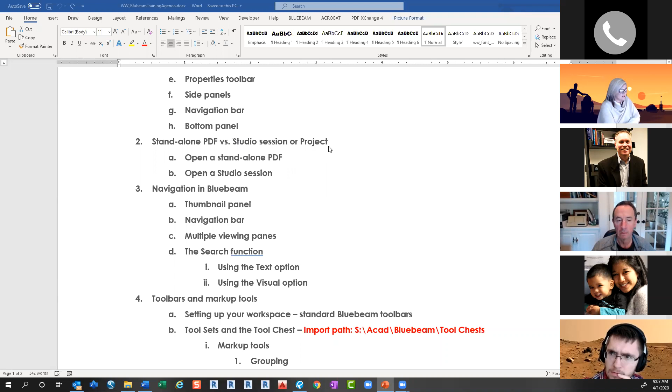So let's get into Bluebeam. This is our agenda for what we're going to cover. First, how to change the workspace color theme. If you're used to Adobe, you might not like that Bluebeam is black. We're going to open it. We have already opened our sample file, or we can open it again. We'll look at the workspace, the menu, the toolbars, properties toolbar, side panels, navigation bar, bottom panel, standalone PDF versus Studio session. Tomorrow's training session is about Studio, so we're not going to get deep into that, but I'll just explain the basics.

How to navigate in Bluebeam, working through the views and using the search function, toolbars and markup tools, just a light touch on that. We're going to talk about the tool sets as well, and a little bit on working with the documents. So we're going to try and cover that in an hour. I'm going to go a little faster than normal, but give you a chance to try it too, hopefully.

So we'll start with, put this over here. Actually, let me do this. Okay, so this is how I have my Bluebeam workspace set up. Let me get this back up and over here. I do want that over there. I'm trying to get all of these things minimized here.

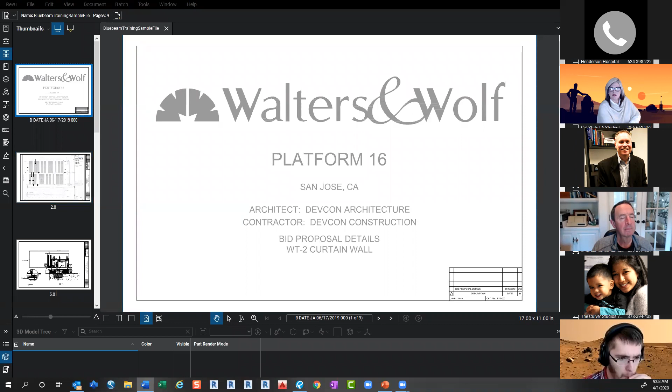All right. So if you don't like the black color of Bluebeam, you can go to your preferences, and on the left, on the general tab, there's options. There's a whole bunch of stuff you can explore here. But you can change that theme to light right there. This is just a light or a dark, and that makes it look a little bit like Adobe. But I'm going to work with it in the dark mode. That's my preference. Okay, so that's the very first thing, just to get you comfortable.

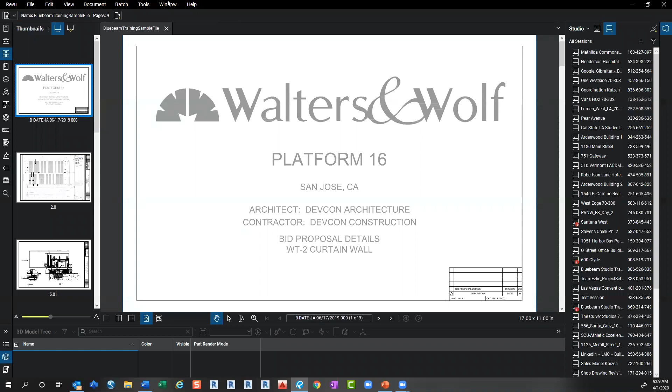So now what we're going to see is in here in Bluebeam, you have the main viewing area. You have all of these panels over here on the side, and these are like palettes. They basically are little flyouts with different tools on them. You have a typical Windows-type drop-down menu at the top, and we do have a properties toolbar that shows here when we get into some tools. I have most everything closed. When you open Bluebeam, you might have a lot of toolbars open.

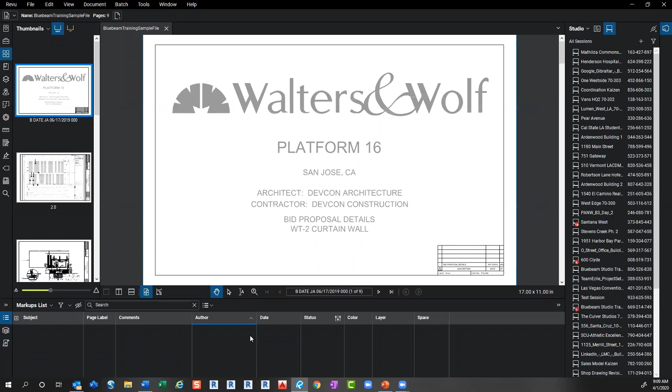So I'm just going to turn them on real quick. You might have a whole lot of buttons going on up here. Those are all toolbars that you'll be able to close or open as you like. We'll get into toolbars again later. There's the markups list down here at the bottom, and a couple of other options. You can toggle between these three options, but markups list is going to be the one that's most useful.

There's some navigating down on the bottom. And over here, I have my studio tab over on the right, but yours probably doesn't look like that out of the box. I'll just drag it back over. But you can drag these panels to wherever you like. So I'm just dragging mine over, and we can go over that again later. So those are panels.

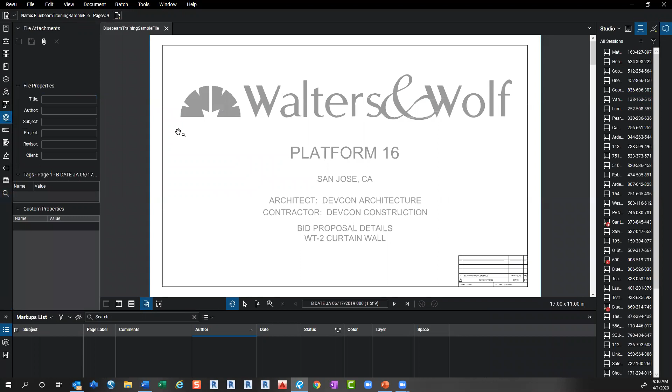Also you'll see you can get to different information in a bunch of different ways, and depending on what we're doing, we're going to see potentially properties up here, but there's also property information that can show up here. So it's like any other program, you can get to the same information in a bunch of different places. So I like to keep the thumbnails tab current.

So it's a little foreign at first. It may not feel intuitive, but once you get used to it, just like any other program, it becomes easier to understand. So again, you have your standard menus. A lot of your markup tools and stuff are going to be up here, but we're also going to look at tool sets. So this is all stuff to explore, stamps and all that we're going to get into. But that's the main workspace.

I think I use thumbnails and this down here for navigation the most. So I use this navigation bar a lot. Some people like to use bookmarks, and there's a bookmark tab for that as well, or panel.

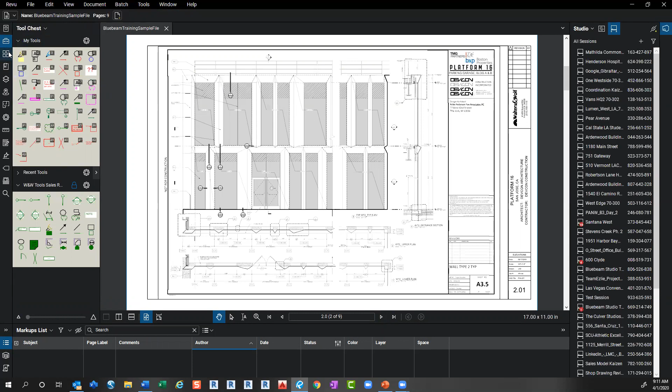Okay, so what's the difference between a studio session and just a regular PDF? Right now I'm just in a standalone PDF. I call it a standalone PDF. I opened it from a hard drive on a computer. I have it locked. Nobody else can get into it. So it's standalone. With a studio session, which we'll get into tomorrow if you're doing that training, which is what we see over here, it's a cloud-hosted environment.

So if I open a session, I will be looking at a team of people that are in the session who've been invited or who are working in it. Although at Walters & Wolf, anybody can join. I have all these documents that are handy to me, and these documents are hosted in the cloud. So they're not living on a hard drive anywhere. Nobody's locked out of these files. The files are living in the session, and anybody can mark them up at any time in that session.

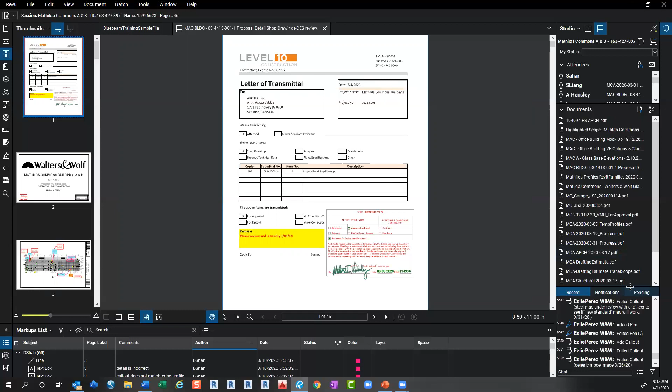And those markups are saved in the cloud as well. So this is a very live environment. It keeps track of everything about the session, all the comments, all the notes. You can see down here, it's tracking the markups, but the markups are tracked in a standalone PDF as well. So if I close that document, I'm closing it from that session. Right now I'm in my own file, and if I do make a markup in here, the markup is still tracked. So they both do that function, but only I can access it right now.

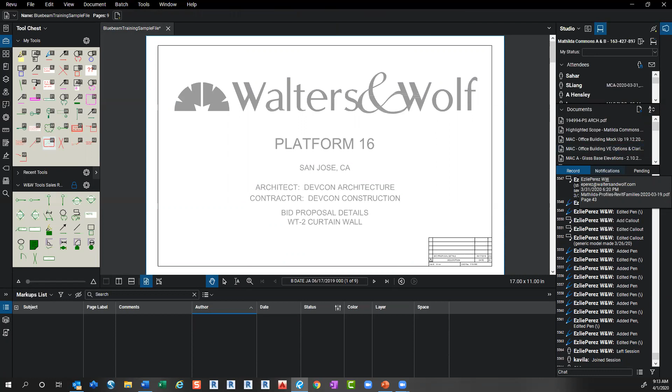Okay, so we're going to talk about navigating the documents. Actually, I'm going to pause for a second, see if there are any questions.

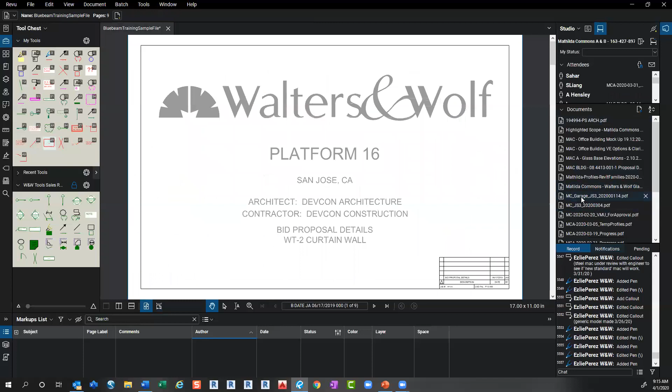So when you're in a session, if I come in here, let's see if I can find a markup. I've got to find it, I don't know this session. Okay, here's a markup. So right now this is in the session and it's a live markup. I can pick on it. I personally can't do anything with it because I didn't create it, but Shiloh created it. And if she wanted, she could delete it. So she owns that markup, but it's also live in this session.

You can access it. If you do a markup on a standalone and then you add it to the session, the markup will go with it, but I believe it becomes flattened. It becomes part of it, you can't edit it. You can't select it anymore like you can here. So it will take it with it though.

Let's see, what else do we have? Do you have questions coming in about Studio? Those are good questions: how to add files to an existing session, we're going to go over tomorrow. How do you access the W&W toolset? We're going to go over that today. How do you add a signature to a document? We can look at that if we have time. Oh, Hensley, thank you, she's trying to answer all those questions as well. If we don't cover it today, we can cover it tomorrow in the Studio session.

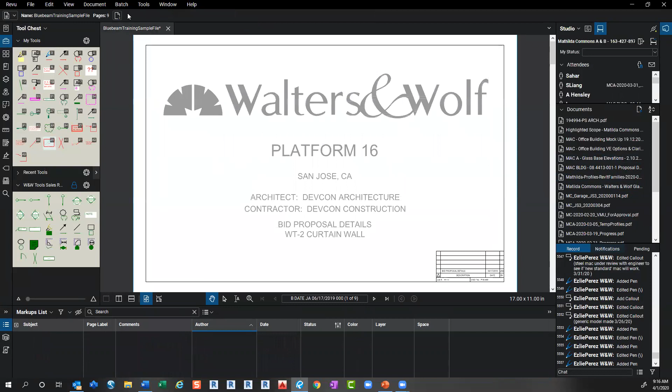I just wanted to touch on it today, to explain the difference between working on a standalone file and working in a session. But I'm going to exit that session, and I'm going to close my Studio panel for now. And Steve just said Slipsheet is available in the Extreme version only. Okay, great. So I'm going to hold on that for a second, and we'll talk about navigation.

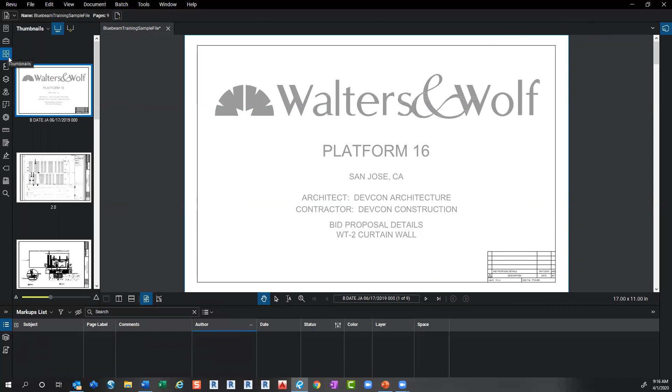My favorite way to navigate a set of drawings is the thumbnail panel. It's what I'm used to, and it's this four-square button over here on the left. You can see at the top it says thumbnails, and you can change the size of your thumbnails. You can make this as big as you want. I personally like this method because I can see the images of the sheets, so it's my preference for navigating.

I've seen a lot of people at Walters and Wolf using the bookmark function to navigate, and that's okay, but a lot of times bookmarks aren't working, or there are issues with bookmarks on sets that we get from somebody else. The thumbnails always let you at least see the sheets, and you can pick on them to go to each sheet.

The navigation bar down here at the bottom has several arrow buttons. You've got the page number in the middle, and we'll talk about that in a second because those only show up if there are page labels. If you want to navigate through the set, there's single page forward or page back, and there's the one that goes all the way to the front or all the way to the back.

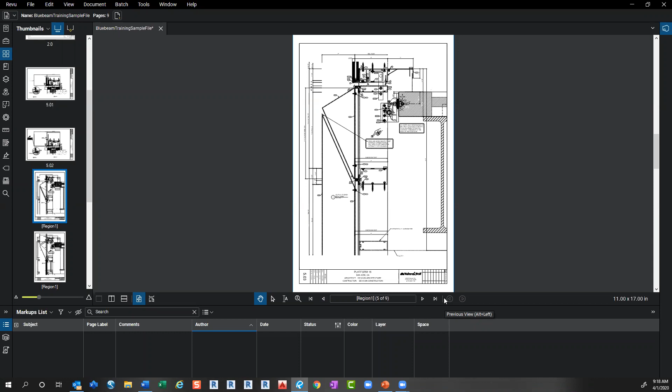And then if I go back to the front here and I pick here, I don't know why. Usually the previous view and next view are highlighted, and it'll just back you up. I'm not sure why it's not showing up right now, which is kind of weird. Usually those are available, and that's a way to step back through your document. I'm going to have to look that up. So that's a little bit of navigation down there.

You can also type in the name of the sheet. If you know you need to go to 5.01, you can just type in that sheet name and it will take you right to that sheet. There's the pan, select text, zoom. These are typical tools. Mine is always set on pan, but if you wanted to zoom in on something, you can do that.

Normally I should be able to step back, but it's not letting me. That's really strange. So you can see right now I've kind of messed up my view. How do I get my view back if I want it extended all the way out? I can just pick that one full page button.

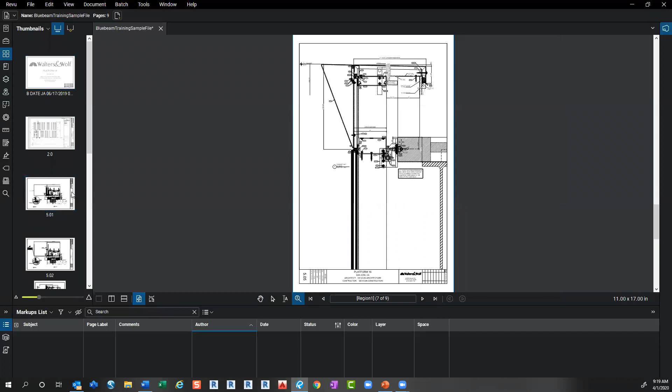So we'll look at that now. So I'm going to go back to my elevation. And when I'm working in Revit and Bluebeam and I'm trying to see all the different stuff to build my model, I like to look at an elevation and a floor plan and maybe a wall section and a detail all at the same time. So I'll start splitting that screen up.

So I'll start with the elevation. Oops, let's do that extent. I'll split it. So now I have two views, and then I'll pick in that right view. Oh, I'm set to zoom. Let me unselect that. Okay, now set back to pan. So now I'm in that right view, and I don't think there are any wall sections in here, but I'll just look at several details at the same time.

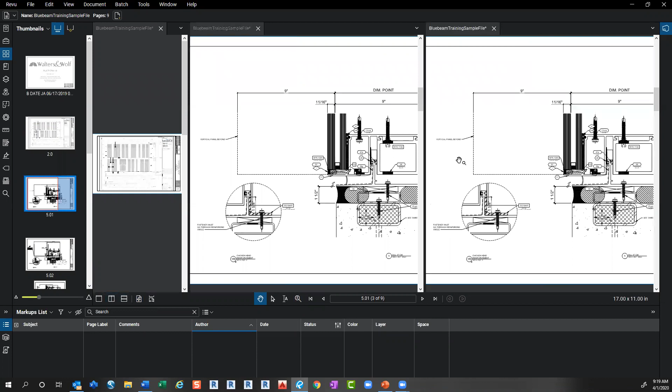So now, if I pick in this view to activate it, I can split it again, pick in that view to activate it, and split it again. And in each view, as you select it, and then pick something from the thumbnail, it will change that view. So if I pick in this current view right here and select that detail, now that one shows up. So I can have multiple things to look at the same time, which makes it really nice.

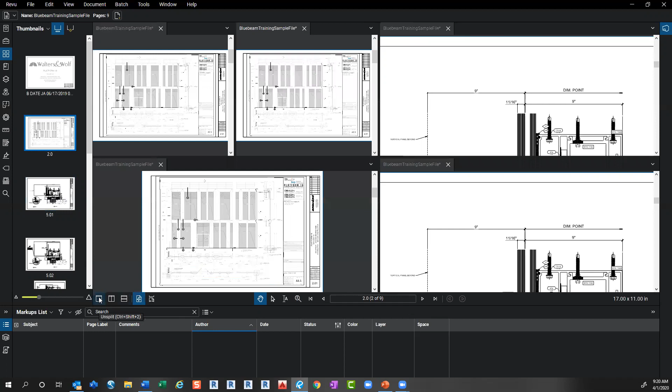You can split them any way you want. You can split them vertically. So if I activate this view by picking in it, split it vertically. Activate that view, split it. You can activate that top view and split it horizontally. This one will unsplit, or you can just close them all as you don't need them anymore.

So again, when the view is active, you hit that split or split horizontal, whatever way you want, pick in the active view and then split that one. So I use that all the time when I'm working in Bluebeam because I'm always looking at a bunch of different drawings at the same time for modeling. So that's multiple viewing panes.

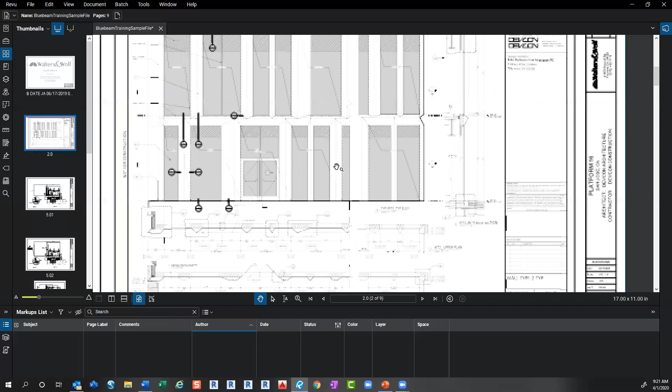And when you're in those viewing panes, these other two options over here, you saw me hit this one down here several times. That's one full page. And then in my Bluebeam, when I roll the mouse, it zooms in and out. I think there are settings where you can change that, and that's in the preferences that we'll talk about later. But if I set it to this one, scrolling pages, it puts it to the extent of the viewing pane. And now when I use my mouse wheel, I can scroll.

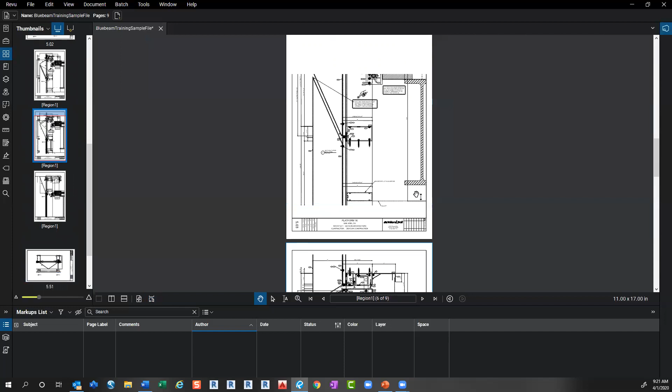I can still hold the control key down and zoom in and out though. So that's what I'm doing right now. I'm holding down that control key. Now I'm still just scrolling. So that's the scrolling pages option. Zoom extents to get the full page. Use the scrolling and roll your mouse wheel. Hold down control to zoom in and out in that setting. And now I'm just rolling the mouse wheel. I'll go back to zoom extents. One full page. I call it zoom extents. It's an old AutoCAD term.

Okay. So we talked about the thumbnail panel as a way to navigate. You see when I pick it, it goes away. If I pick it again, it comes back. You could use the bookmarks, but that's the thumbnail panel. Then there's the navigation bar down here to help you, and the multiple viewing panes is a nice feature. You can see more than one thing at a time.

So one of the really cool things that I like about working in Bluebeam is the search function. If you do need to search a document, I'm gonna play with the search function in two different ways. When I bring up that panel, it's just a little magnifying glass over here. And so when I pick on that, I have the search. This is the tool. You can see you're in the right place up here. And if I hover over this, it's searching by text. If I hover over this, it's searching by visual, which is really cool. So I'm going to pause here for a second because I do see some questions about navigation.

So bear with me for a moment.

Will you still be able to see who marked it up when it's flattened? I don't believe so. If you can't pick on it, we really can look at that. I'm not sure, it's a good question.

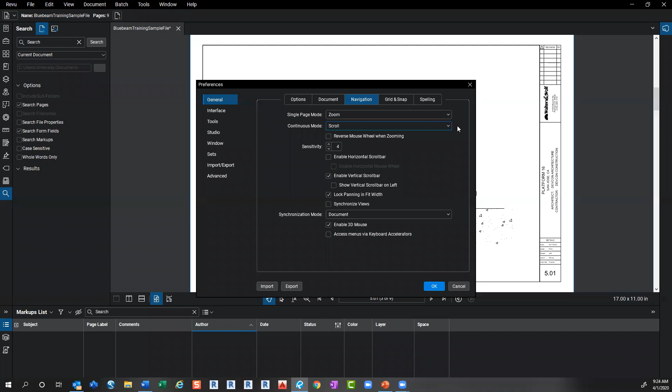Okay, so I'll just touch on that now so you can play with it, and then we'll go back into preferences again later. If you go to preferences, general, and navigation, you can change your settings here. That's how mine was set up. If you want to change it, you can play with continuous mode, single page mode. There are some options in here that I might have changed and don't remember from when I set up Bluebeam a long time ago, so I apologize for that. But this is where you can play with all kinds of settings about how the mouse behaves.

How do I get the navigation bar on the bottom? If the navigation bar isn't open, go to the tools dropdown, go to toolbars, and check on that navigation bar. If I uncheck it, it goes away. I thought it was on by default, but maybe it isn't. So you can get all of those toolbars turned on or off. I keep most of them off, but to turn something on or off, just check it in that toolbars option.

Actually, the properties will show up. Okay, great.

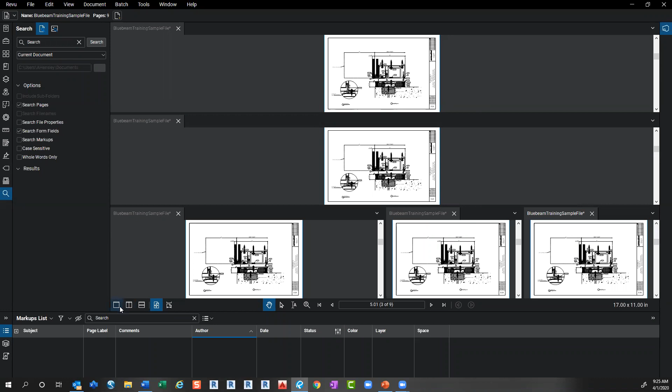How many multiple views can you do? Gosh, I'm not sure if there's a limit, we can find out. They're too small to split further. Okay, there's your answer - you probably have to keep them a certain size, and then it will tell you it can't go any further. So it looks like there's a size limitation, but that's a good question. Let's go back to a single view.

Navigation bar disappears when on the laptop, but shows up on a larger monitor. Well, that's interesting. If we do have problems with some of that stuff, we can take a look at it. I'm not sure of some of the quirks that might be showing up with Bluebeam, but if you can't get something to work right, definitely reach out to me. Bluebeam also has really good resources online for getting help on stuff like that. So we can find out if that's a known issue if we need to.

Okay, I'm going to stop the questions for the moment and play with the search function. I'm going to search by text first - maybe I want to find every page where embeds are. I'll do a search for just the embed text. If I do search, you'll see all these pages show up down here, and if you select on them, it will take you right to the sheet where that text is. If I pick on any one of these, it doesn't necessarily zoom in on it - it's just taking me to the sheet, but it will get you to where that text exists. That's nice, and you can just empty the search results.

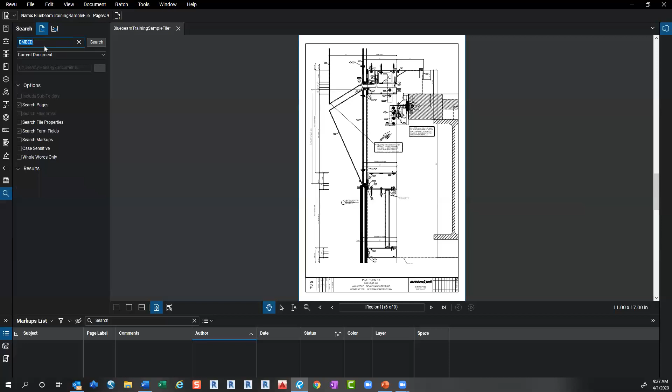So again, you're just typing in a word - I want to find out where shadow boxes are, where my shadow box details are. I do a search for that and I get one sheet right there.

But the really cool thing in my mind is being able, if you do need to search, maybe you want to find a particular callout - you're not sure where, maybe there's a fastener or something that's called out and you want to catch it and change it everywhere, or maybe it's wrong. You can search by visual as well. You could use the text potentially, but you can also search by visual.

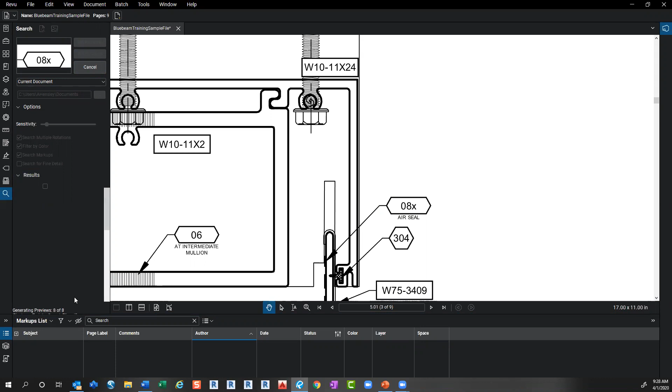So if I go back to that search panel and select visual, I can do a get rectangle, and I'll do a little screen capture. So it puts that image there. If I don't mess with any of these other settings, and just tell it to go ahead and search that, tell me everywhere in the process - you can see down here it's processing, and it's finding everywhere in the set where that shape shows up. But it's not getting specific about the text.

So I want to find only the 08X, so I'm going to clear those search results. And again, with that same rectangle I already captured, I can set the sensitivity up and then do the search again.

And it'll get more specific with its results. So now it found 2 sheets, that sheet and that sheet. So if I zoom extent and I pick on these, you can see it taking me to the different sheets.

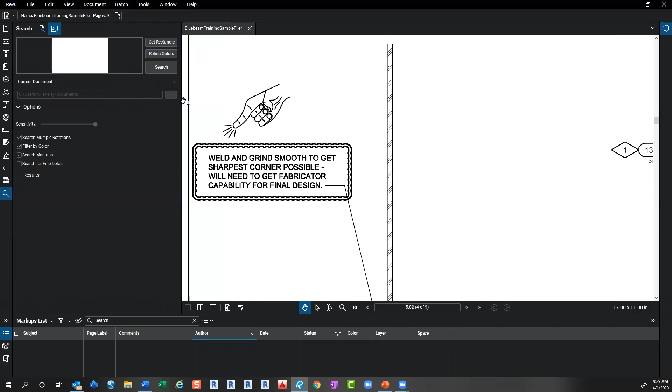So again, I'll just clear that and make a new get rectangle. I wonder if we can find this guy anywhere else. Is this anywhere else? Is it going to find it? I haven't tried searching for that guy. Let's see. Maybe we can try get rectangle and search for this. There we go, didn't like the single finger. So I'll do a search for that image.

And again, it's processing, and it's a very refined search. So it's going to find 2 sheets where that exists. So I think that's a really nice little tool.

And again, you can also tell it to look in just the current document, the current page, or all open documents or documents in a folder. So it can get pretty powerful. I haven't played with that a lot or needed that, but if you do have multiple documents, and this doesn't have to be just for drawings. It can be for contract reviews or anything that's very wordy. You can tell it to look for specific text in a lot of different ways, and it'll dig deep.

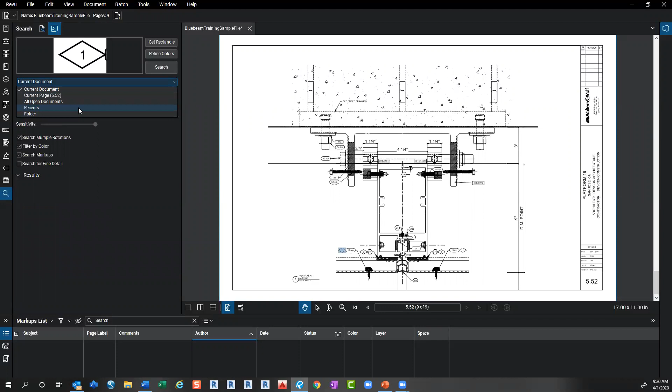So that's that search function.

Does it search the image or the text in it? Does it work with scanned documents as well? So scanned documents are a different beast. If I go back to, this PDF has a scan on it, and I can't do anything with that screen captured or copied thing. I believe it has to be printed using the Bluebeam printer driver or a PDF printer driver to be able to get to the elements.

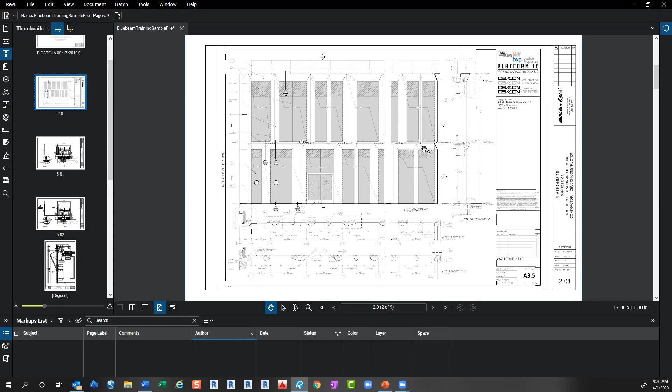We can try, let's see if it'll find it. If I go to search, get rectangle, and do that. Well, it still sees it, so let's see what happens. Okay, it only found one, but there is another one here. So I don't know how far it will reach to things that are not generated through a printer driver. So it only found that one. I don't have a good answer on that one, but yeah, that's a good question.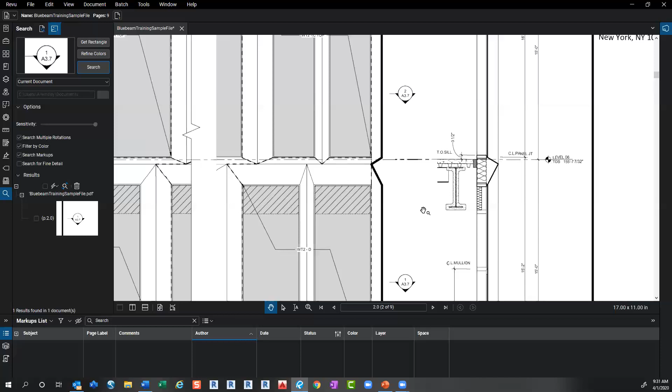Okay, so that was the search function by using either text or the image that you do a little screen capture for.

All right, so now we are going to go to toolbars and markup tools. I'm going to very lightly touch on this, but Bill is really a great resource for getting more into customization.

The basics of customization, as far as tools, if you go to the toolbar and the tools drop-down menu and toolbars, you can turn on all of these different options if you want. But you can also come down to customize, and you can actually change what's in each of the drop-down menus. You can create your own toolbar, so if I say add, I can make an Amy toolbar.

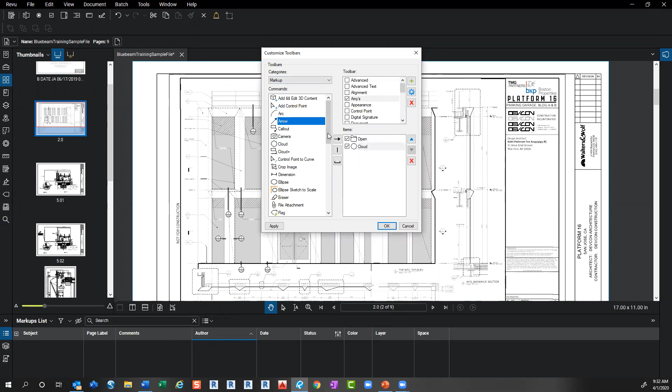And now that it's current, I could add my own tools. So I could go to the markup drop down menu and add my own handy tools here. And now I have my Amy's toolbar, right there that I just made. So if I turn off all of these other ones that I don't care about, I have my own little custom toolbar here with just what I like to use.

So that's a nice way to customize the space. When you go to tools, toolbars, instead of using the default ones, you can go to customize and create your own by hitting add, giving it a name, selecting it, and then going through all of these different menus to grab the tools you want to use. We've got a lot of tools in here that I never use that probably are really handy.

I love Align in Revit, so it's probably great in Bluebeam too. Document management, all of that. You can add any of these to your personal menu just by hitting that little right button. You can add a divider, separator, and then add more items to it. And if I pick OK, then I get a little... whoops, did I cancel it? Nope, I did do it. Okay, there it is. It should have updated that, but it didn't.

Let's try that again. Well, I don't know what I did wrong. I haven't played with that much, but I know you can go in and customize it and talk to Bill. He's a really good resource for messing with this stuff. I'm going to turn that one back off though, because I don't really need it.

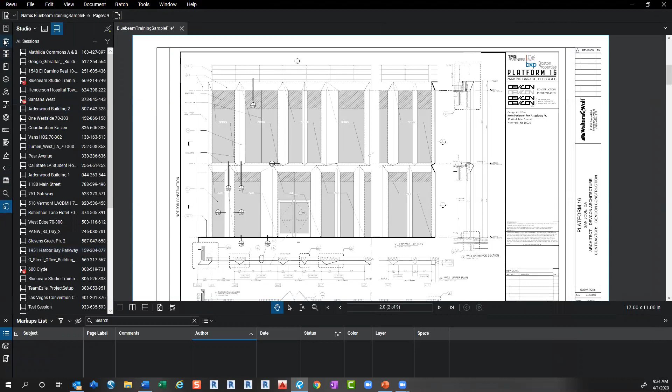From these panels, like you saw me do earlier with Studio, if you want to have them on the left or the right, you can drag and drop them. Whoops, I did not mean to do that. I think I undocked it, completely undocked it, so let's get that right. Just pick on those different panels and you can move your toolbars over and drag and drop. I like to keep mine over here, with Studio on the left.

So we'll talk about the markup tools. We'll talk about tool sets now, tool chest and tool sets. Okay, so first of all...

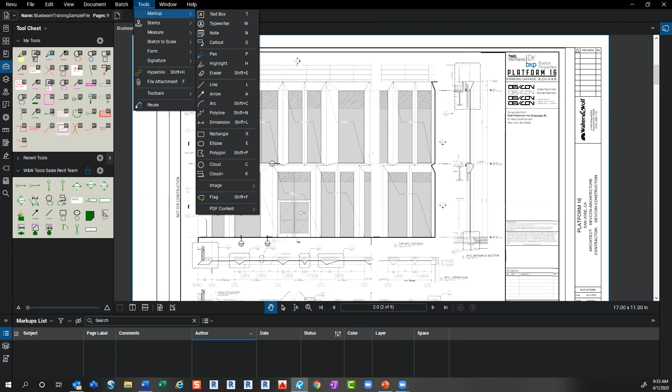Markup tools are on the tools menu, like just the standard markup tools, can be found in a couple of places. There's some basic markup tools that you're used to, the line, arrow, arc, and all of that. Here, actually I hear somebody, so let me just check to see if I need to mute. Let me find it. Ah, there we are. Okay, so there's the tools, markup up here, and line.

Okay, so there's my line. I've created a line. When I pick on it, now I can see this properties toolbar up here, and I can change its color right there. I can change its thickness, anything like that. It's normal. You can change the line type, whatever you want to do.

So once you have a markup there and you pick on it, that properties toolbar will show up and let you edit that item. You can also go to the properties panel, and that will give you all the information about that tool as well. You can get really custom in here, because now that I've made this, I could give this a name and add it to my own tool set. We'll get into that in a second.

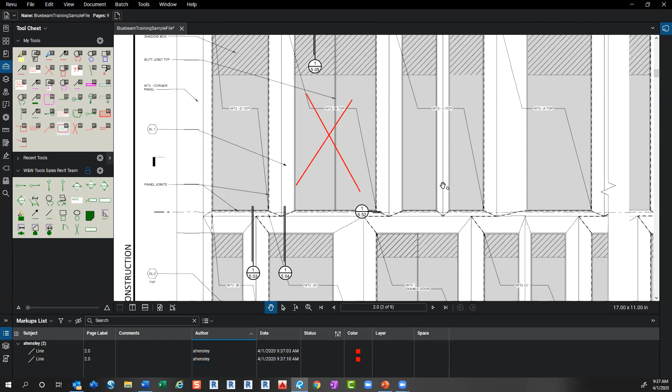If I say there's a typical markup that I do all the time, let me get this back open. So maybe I make a line and another line, and I want this X, and I want to use it over and over again, and maybe I have some text with it or whatever. If you select both items by holding the shift key down and windowing it...

Hold that shift key down and right click, you can create a group. So now it's a single markup. Then you can right click, add to tool chest, add to my tools, and now that tool is there. So if I don't have it on this sheet and I want it, I can just grab it off my little tool set. To get the tool chest going...

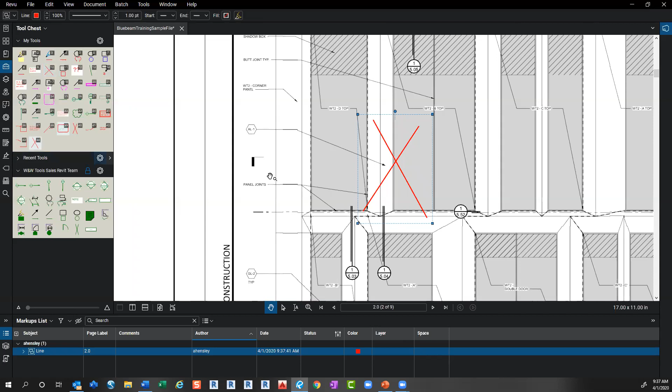You click on the tool chest panel, and right now I have my tools expanded. So that's how we did that. I just showed you a couple things all at one time: there's the tools, create a markup, create some sort of custom markup if you want.

Let's go in and, whoops, we'll do some text. Okay, so this is something I want to put everywhere. Again, I hold down the Shift key and window it from left to right. Hold down the Shift key, right click. Oops, I lost it, sometimes you lose it. Right click, group.

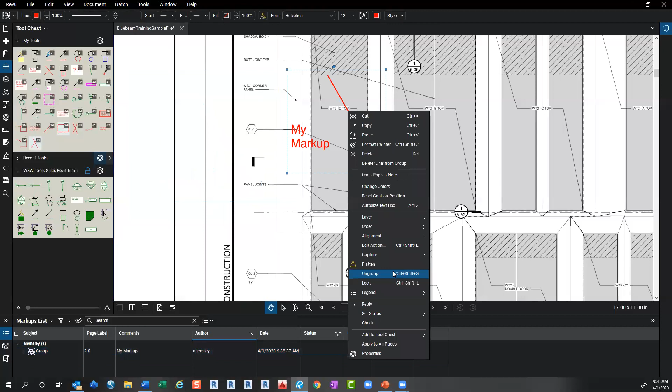And now it's just a single markup. You can also ungroup it. If I right click, I can ungroup it and it basically explodes it. Now that I've created it, if I have my tool chest palette open and my tools expanded, I can right click at the bottom, add to tool chest, my tools, and then I'll see it there as my custom tool that I can just bring in. If it's something where it's sort of what I want, and I want to be able to edit the text, I can right click after that and explode it or ungroup it, and then change it.

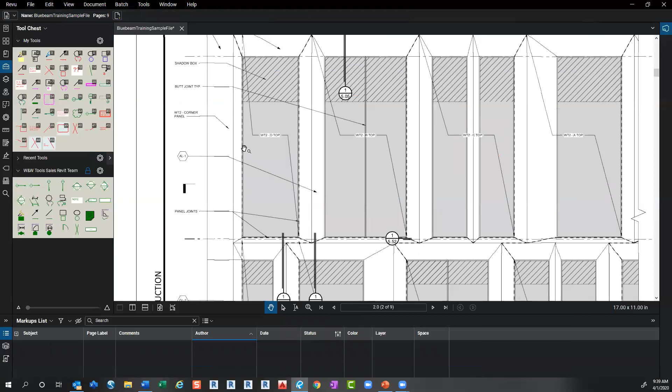So if you have something you do repeatedly that's not on one of our standard tool sets, which we're going to get into, then you can just create your own. The only thing that we do ask is if you're working in studio sessions, we do have specific colors for the different types of teams. But if you're doing your own markups and you're just doing your own thing, go for it. Make the tools that work for what you need. I have a lot in here. I bring in my little revision bubble. So that's the standard markup tools from the markup dropdown.

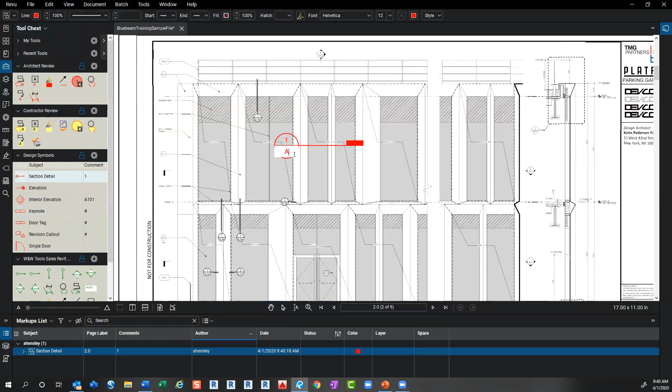But once you do get that tool chest panel open and you hit that dropdown, you see there are a bunch of default sets that come with Bluebeam that have tools you can use. So when making the standard tool sets for Walters and Wolf, which again we're going to get into, I actually grabbed from a bunch of these existing tool sets, and then I just made the colored groups. So the nice thing, you can bring in the section detail and you can just edit it. So they have all these pre-made symbols that are editable and ready to go.

So to customize it, all I did was pull that onto the sheet, pick on it, come up to the properties and change the color of the line, change the color of the text. That's not a very good color, but maybe I want to change the font, or maybe I want to make it bigger. You can just pretty much do whatever you want. You can grab something that exists, select it, and in those properties, either on the properties toolbar or on the properties panel, you can make it your own tool.

You can give it a name if you want, subject, section detail, new, and that should show up. So if I edit that, and then I go back to my tool sets and I added it to my tools, I believe section detail new now shows up as the name of the tool. So if you do want to give it a name, you can pick on it. You can grab from something that exists, pick on it, customize it using properties or using properties this way. You can give it a name here in the subject, and then that will be what's in the hover over with the mouse. So a lot you can do to just really set it up the way you need it.

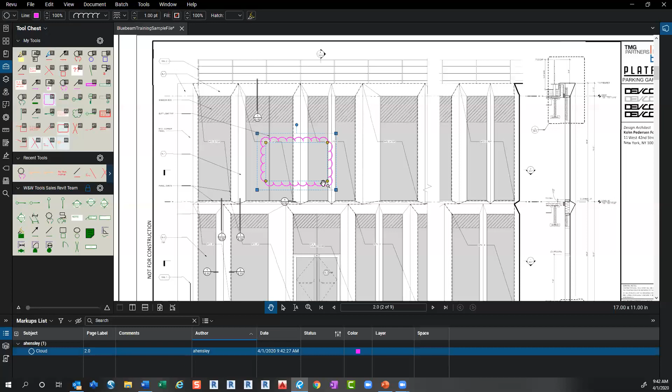Add it to My Tools, right click, add to tool chest, My Tools. Then you go back to your tool chest, and there it is. And when you hover over it, you can see that new name, and you have that new tool ready to use. So there's a lot you can do with what comes with either these markups here or with the standard markups that come with Bluebeam, which are up here. But you can see also in my list I'm going to turn off these other ones. I like recent tools. We can talk about that for a second. Recent tools just keeps handy things that you've just done. And as you close out of your session, I believe it will clear that back out again. So this just keeps things handy if you want, but it will clear out after the session.

But also, if I close that, you can see I have this Walters and Wolf Tools Sales Revit team. So every team in the studio sessions has their own color. So they all have the same set of tools, and we just went in and we made new colors for them. So the estimating team uses blue, Jumpstart, red, and everybody has their own color. There's Ezile's team color. It was just basically take these tools, bring it out here, pick on it, pick a new color, and then add it to that tool set. So it's getting into, but these are our Walters and Wolf, they're locked down, so we can't edit those.

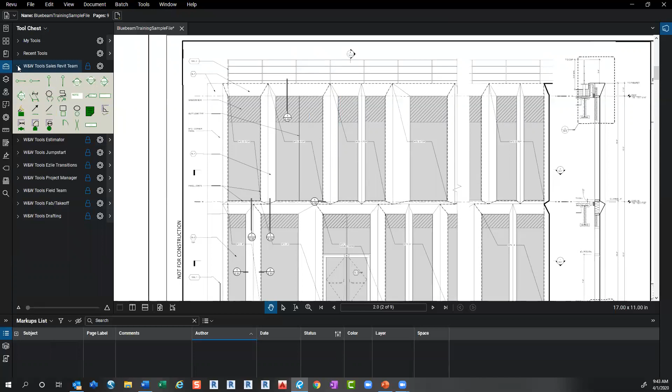So again, the colors here only apply in the studio sessions, so that when everybody's making markups on the same sheets, we know where the markup's coming from. You don't have to use them if you're just working in standalone PDFs, that's your call.

But to use those, if you go to that drop down and you go to Manage Tool Sets, let me see if I can get this to grow bigger. I don't think I can. Okay, so you can see all the different tool sets I have loaded. And if they're checked, that means they're on. If you don't have them, you go into that Manage Tool Sets. I'll just go back out again. So Tool Chest, Manage Tool Sets.

And you import by browsing to our server, which I'm not connected on the VPN right now. Let me get that connected. That's the wrong one. I forgot about doing that this morning. So you browse to the server, and we do have some tool sets, and they're in this drive. I just got to get connected so I can browse them. That's taking a second. There we go.

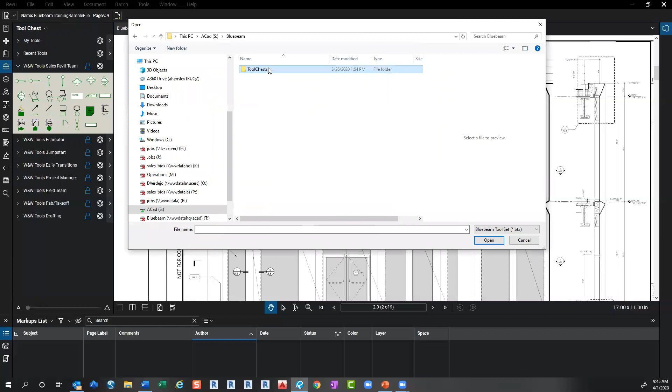Okay, so on Fremont, we have our ACAD drive. And in there we have our Bluebeam folder and our tool chest. And these are all the standard tool sets right here. So I'm going to bring in the shop drawing review stamps because this is something new that Kaizen group has been working on. And I'm just going to pick the open button. It might take it a second. So now I have imported that set. There we go. Just took it a second.

Okay, so here's a new set that the Kaizen group made. So what I just did was I went to Tool Chest, Manage Tool Sets, Import. I browsed to that location on our server, our Bluebeam folder, which is on ACAD, Bluebeam, Tool Chest. I found that new tool set that they are managing, and then I picked Open, and then it took it a second to load, and then it was available to me.

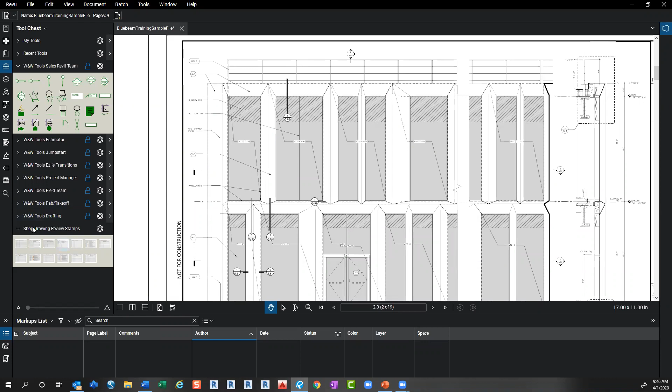So what they've done here is they have a set of stamps for review that they've created, that you can just drag into your sheet. I don't think they've formally launched those yet. I'm not sure. Somebody can correct me on that if I'm wrong. But this is another way of using the tool sets. So they've created custom stamps, which we haven't looked at yet. And they've added them to their own tool set that's a standard tool set, and they manage it.

And when they have that ready to go, they send it to me. I get it into the server where IT has a place where they can replicate to all of our offices' servers. And now everybody has access to that new stamp set. If we were to add new stamps to these sets, I could add the stamps, get them on the server, but they don't automatically show up updated in your Bluebeam. You do still have to go import them again.

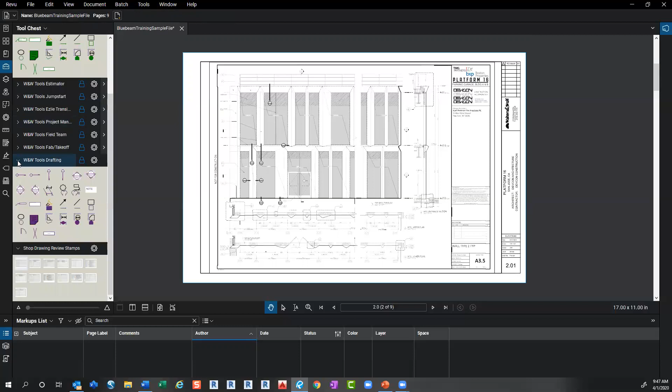So if you got an email saying, hey, we've added some stamps to our standard set, you would go into Bluebeam, go to your tool chest, go to manage, and you would still go and reload that same tool set. You just would import and overwrite your existing tool set.

So I'm just going to look at some questions here really quick. Amy, there was a question that Paul had that might be helpful for everyone. I wasn't allowed to share a snip on the chats. Could you show the settings to snap to objects? So if you're drawing lines or polylines, you can snap to the objects in the PDF.

Okay. It's under preferences. Let me get all these guys closed. Revu, preferences. Under tools, or grids and snaps. Grid and snap, here we go. Yeah, I haven't actually played with this myself. This is good. So you can click on the ones to snap to grid, snap to content, snap to markups. So that's helpful if you're trying to trace something or draw a little more precise on your PDF. Okay, that's a good tip.

So let's play with that for a second. How much time do we have? We have about 10 minutes.

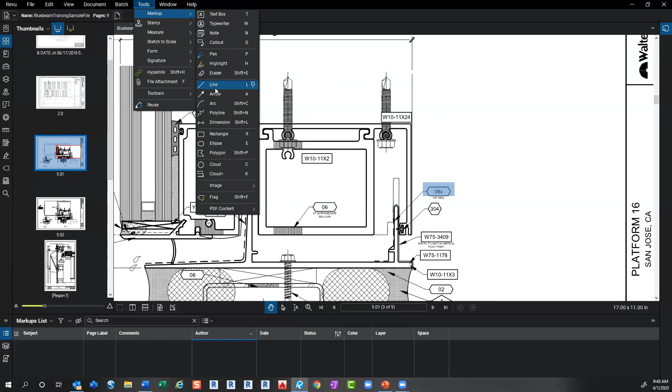Okay, so if I have that set and I do want to draw something, tools, markup. If I do a rectangle right now, it snapped for me. So that's probably how they use it for doing takeoffs, I would imagine. So that's really good. That's a good tip. So that was under Revu, preferences, on the general tab, grid and snap. And as soon as I enabled these, all your separate other snap settings showed up. So that's really great.

Okay, let's see. Okay, great.

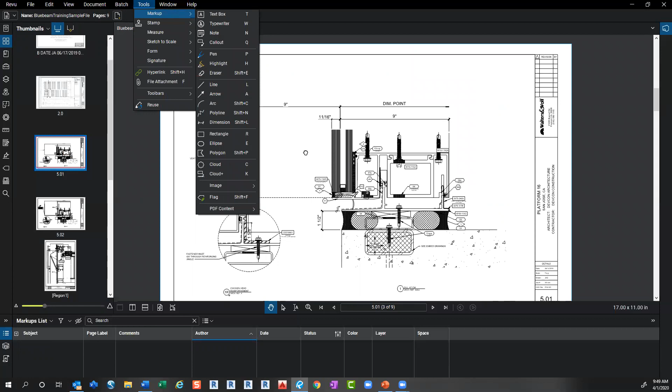So we talked about making a markup, where your basic tools are for drawing your own geometry, where there are tool sets, creating your own tools by grouping your markups, adding those personal repetitive tools to your own My Tools by right-click, add to My Tools. So again, here's my new tool, right-click, add to tool chest. And in this case, I'm saying add to My Tools.

So when they created the stamps, they probably had their tool set current, and they were allowed to select which tool set to add that item to. So stamps are really handy. So that's the tools markup stamp option. And there's one that I made that I use when we're working in the sales models. When the guys need a new frame and I've finished it, I just put a little check mark on the PDF that's just my own personal, it exists, it's complete.

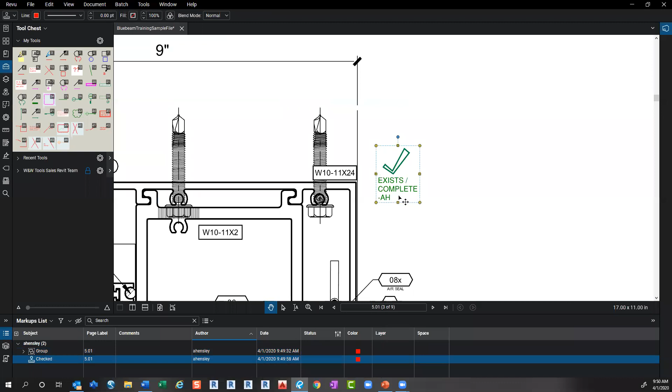So this is my own stamp. And now that stamp is available in my list. So you can create your own stamp right down here at the bottom if you want to do something like that. There are a bunch that come with Bluebeam. But if you want to create your own stamp and you just take the default settings, it gives you a little workspace, and then you can come in here and create a markup, typewriter. Okay, so you can make it look like a typewriter.

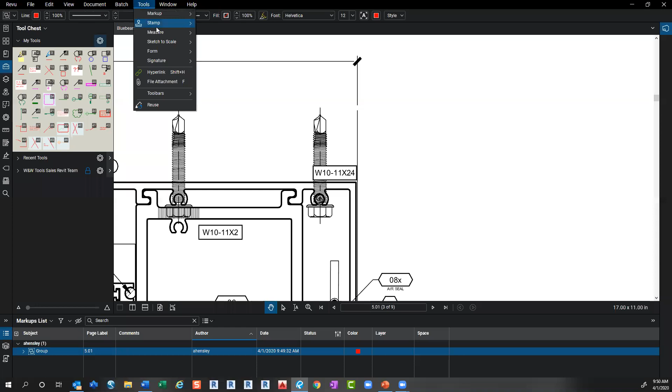You can save that. If you go to close it, it gives you the chance to either save, give it a new name, or don't save. So you can play with that option too. Don't save. But that's under the tools stamp. So you could create your own stamp, and then you could add that to your personal tools as well, so that it's always handy in your My Tools.

But that, again, that's how they made the shop drawing review stamps. They actually created stamps, it's going to take it a second to load, that they can then drag onto those sheets. But instead of having access to it through the stamp pull down, you can just access it right off that tool set. So how to get things the most handy.

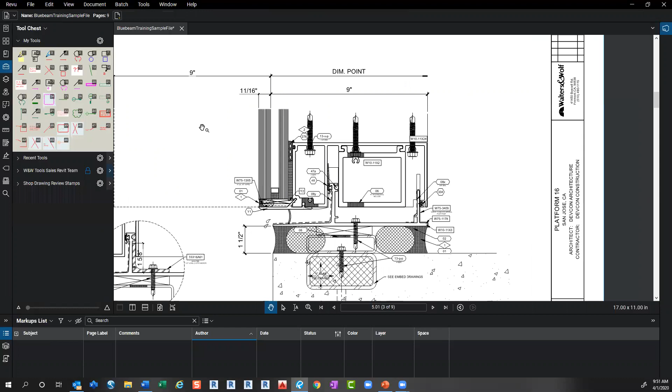I will talk about calibrating and taking measurements a little bit more here. So this is really helpful. I use this a lot when I'm just working from PDFs and I had to build a model, and we used to not get as many architectural models as we do now. You can calibrate off of a printed PDF. I cannot calibrate off of this scanned image, but I can calibrate and take measurements off of PDFs that have been printed properly.

So tools, measure, calibrate. So first I'm setting the scale of this page, of this sheet. It's per sheet. So I'm going to say calibrate, and then I can pick the two endpoints of this dimension. So by default, it will find these. You don't have to change the snap settings to find that. And then I come in here and I tell it it's 9 and it's inches. So now I've calibrated for dimensioning on this sheet.

So now if I take a linear, like a length measurement, and I pick on these two endpoints, it tells me it's 5 inches. I can pick on that dimension and then drag that out. So if you don't have all the dimensions you need, you can still use dimensions that exist on that sheet, and it'll be accurate.

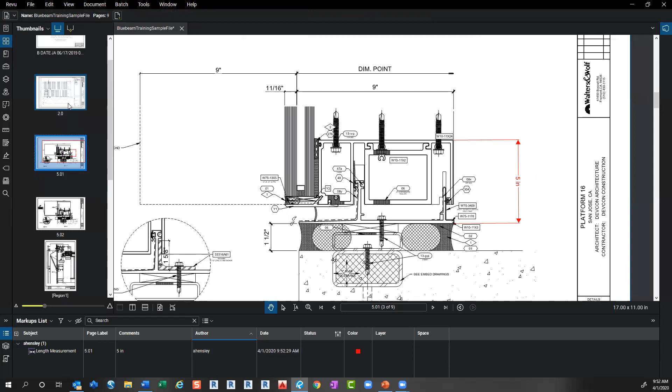I use this on floor plans and elevations a lot, but again, I can't demonstrate it on this one. And I didn't want to load 600 Clyde, the big file that I usually use for demonstrating, I was trying to keep it light. But that calibrate tool is super handy. So again, that's tools, measure, calibrate, pick the endpoints of lines that exist.

Try that again. I'll just pick the 2 endpoints here. That's 11/16. I've already calibrated, so it's fine. Oops, inch. I hit enter, have it. 11/16 inch. And if you do need to recalibrate, you can calibrate it again, and then there's an update, and it will update all of the dimensions to that new calibration. So, but this one is still correct.

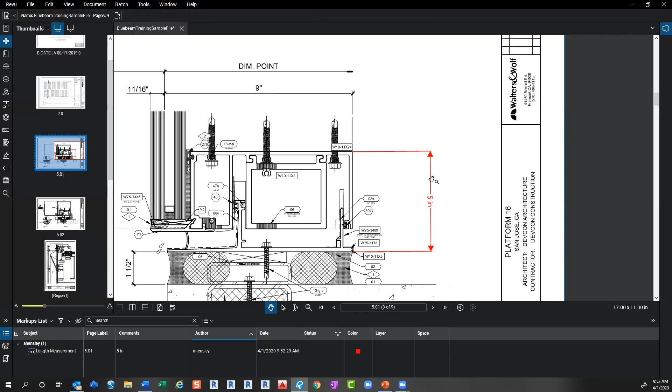There's a recalibrate. So I'm touching lightly on all of these tools, but there's a lot to explore about these, a lot more you can do with them, but this is just to let you know that they exist.

Is there a way to repeat your last tool used without clicking onto the tool every time? Yes, there is. Bill is a great resource for this. I believe it's in preferences and tools, reuse tools. If you check that, I believe, let's just check that. Let's try tool markup, line.

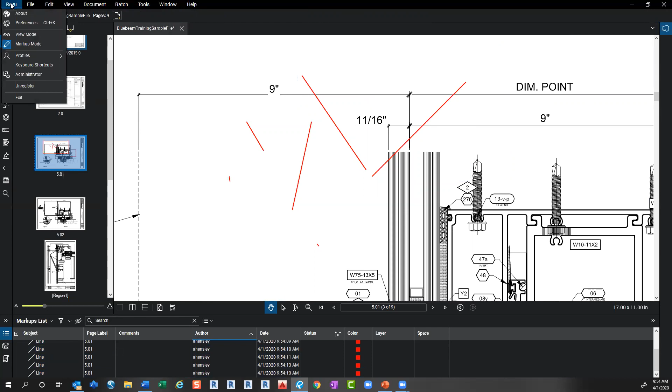Now I'm stuck in that tool, and every time I click, it's making a new line until I hit escape. So Revu preferences, tools option on the left, and then markup, reuse tools. I'm going to hold down shift to select all of those. Whoops. And delete them. Let's try that again. Shift, delete.

So we just talked about taking measurements and calibrating, which I find very, very handy. So the last thing we can talk about is creating page labels and extracting and just working with documents a little bit. So this is really important in the process. If you are working in Studio Sessions, you want to create page labels or batch link, which we can do with Revu eXtreme, where we can actually create links between the bubbles in a contract document or somebody else's document. You need to do those types of steps before you put a document into a Bluebeam session.

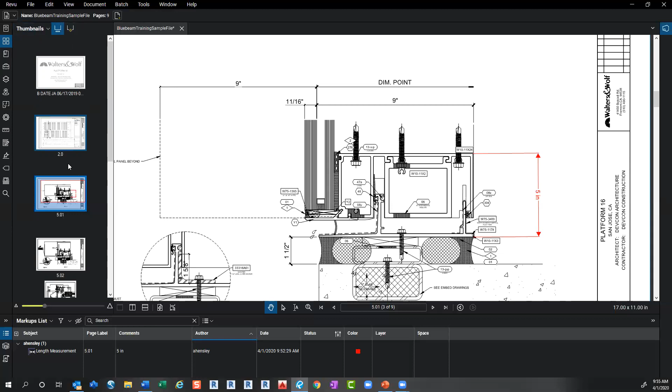If you get that contract set of documents or any set of documents into Bluebeam and you didn't do the page labels, the file is locked. It's in the cloud. It will not let you do that. So part of the process when we get these new documents in is we do want to create these page labels and batch link if we have that tool before the session. And so that option for creating page labels is on the thumbnails tab. So right now you can see that I do have page labels, and I should have put one in here where we don't have page labels, but here's the process.

So you go to create page labels. I'm going to select a page region, pick the OK button. Oops, I'm supposed to select first, sorry. It's been a while since I've done this. I'm just going to grab a little window around the sheet number in the bottom right. It gives me a preview, so I know it's captured it correctly, and then I say OK. Now I pick the OK button, and it will process and create those page labels. They now show up under here, and they show up down in the navigation bar.

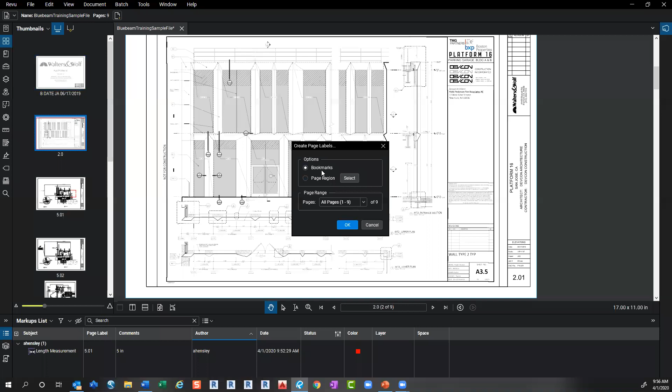So you can try it with any new contract document you get. If they don't already have those labels, go to that thumbnails tab. Click on create page labels. I use page region because I just don't use bookmarks, but you can use it with bookmarks. You can see that as an option and you can try that as well. But I like to use page region, select. And I'll just grab that little window. There's my preview, so I know it's okay.

What will happen though is if sheets are not all rotated the same, it will not find those regions. So you can see these sheets here that are vertical. They're not in the same landscape orientation. It didn't find them because it is looking for that specific space on the sheet. And if it can't find it, it won't fill in that region.

But I believe you should be able to, I think there's a way, yeah, rename page label. And you can do it manually if you want. I'll just type it manually here. So I've actually created that sheet name manually because it could not find that region because that document was rotated. So sometimes it will not find it.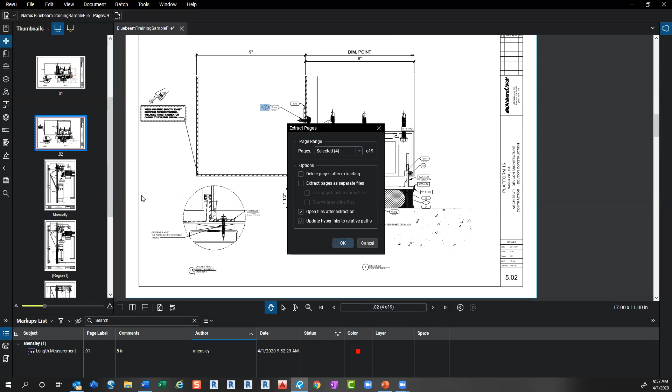If you want to extract a single page from the PDF, you can select it. You can select it from the bookmarks too if you want, but I like thumbnails. So I can right click, extract page, and just make my selection right here. I always just take the defaults, and if I do that, I can extract it to a drive. And it opens it for me.

Then I can go back in if I want, and I can right click anywhere in here, and I can say insert pages, and I can add an open file, like say there's a bunch of files I want to get into a set. I can add all of the open files, or you can add by browsing. And then you have some options down at the bottom of where you want it to go, before or after, and just paste it in there.

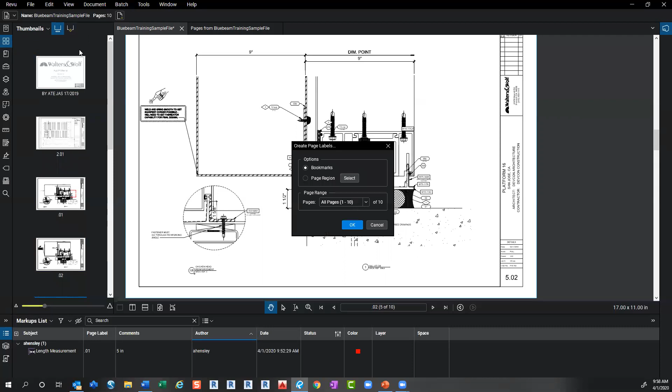So that's not slip sheeting, that's just creating your own or extracting something you need, creating your own group of documents. But those are the very basics of working with documents in my mind. It's looking on the thumbnail tab, creating those page labels. In this version of Bluebeam, I can do a batch link, add the open files, and I can select this little guy down here, get my preview, okay, generate that list and run it.

And it'll make little hyperlinks between all of the things it can find. So it won't work from this sheet necessarily. Let's see how we did. It'll find our bubbles, but it won't find their bubbles. So now if I pick on that, it takes me right to 502.

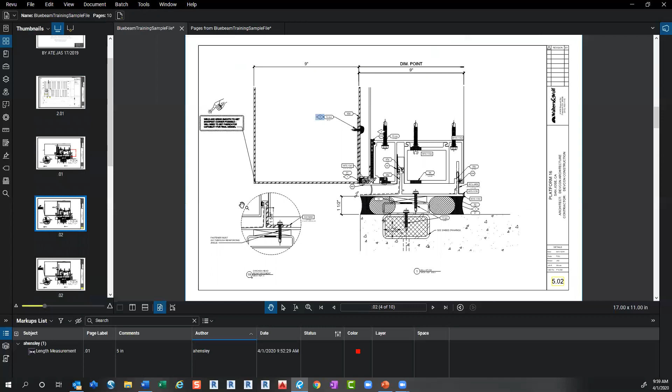So if I have a split screen and on the left or the right I have my elevation, I can just go around and pick on these bubbles. Oh wait, it didn't work. I forgot, it's going to do it right in that view. There's my back. Yeah, it's going to do it in the same view, but at least you can navigate around. And this is where now I can get my back button. Okay, this is what I was looking for earlier. So this little button, previous view, will take me back to that elevation.

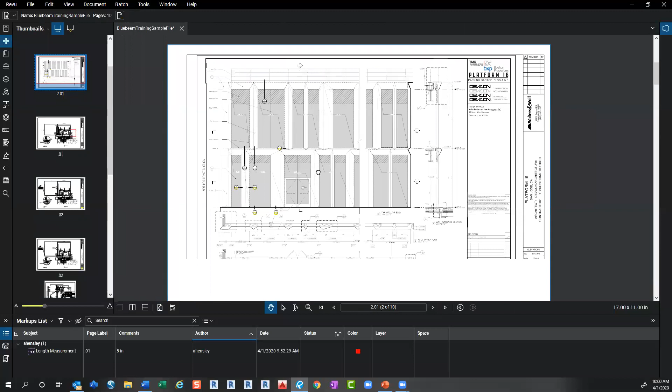Okay, so Esley's gone. Okay, can you do that again, please? So what did you want to see, Efren? Do you want to see the page labels? The page backlinking? Page labels. Okay. Yes.

So on the thumbnails tab, the create page labels option is this little button right up here. You can use bookmarks, but I usually do it by page region, select, grab the rectangle. It gives you a preview. If you don't see it in the preview, then it's not finding it, so you want to make sure you're getting that preview. And then just pick the OK button, I just take the defaults, and it processes it.

So if you do that on a contract set of documents, it's a huge help. Again, you want to do that before you put it in a studio session, but then it adds the sheet number under the thumbnail, and it adds the sheet number down here. So that's right on that thumbnails panel.

Okay. Thank you. Yep. A quick way to have the reuse button is to press F8, and you should have a bar on the bottom right with that option. So if I use line, oh wait, let's go back to my preferences. Reuse tools, I'm going to disable that. Do a line. So we're saying F8. Okay, we'll have to look into that because I'm not sure about that one, but that's a good tip.

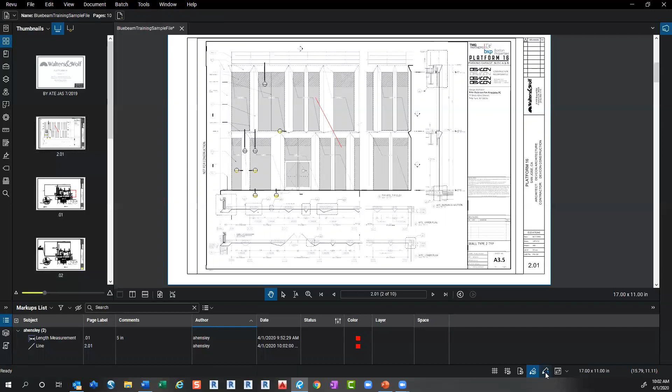A quick way to have the reuse button is to press F8, and you should have a bar on the bottom right with that option. If you press F8, there is a bar that pops up at the bottom. Just see at the bottom, that one. There is the reuse markup tool, so you activate it and deactivate it directly from there without having to go to tools, markup. Okay, so you can just toggle it on and off. Yeah, right here, there you have the button. Great. That's a good little find. Select start point and drag mouse on it.

Okay, cool. Thank you. That was good. A good tip. Oh, thank you. You gave so many. At least I share one.

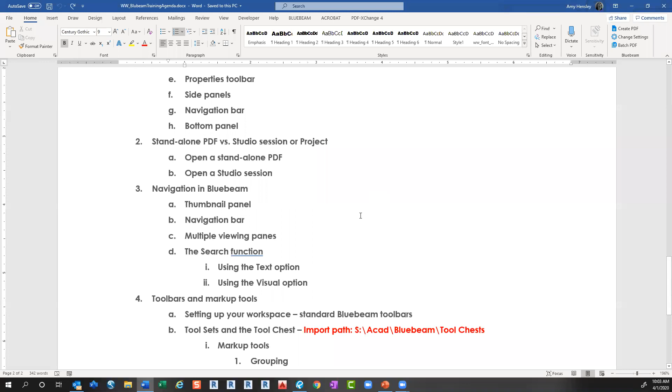All right, so that was really what we're trying to cover today. It's been an hour. We went over this high level intro to the workspace: how to change the color theme, the general areas, the difference between a standalone PDF and a studio session. We touched on that, but there'll be more on Studio tomorrow. General navigation using thumbnails, the navigation bar at the bottom, how to make multiple viewing panes, and the search function with text or visual with this little snippet.

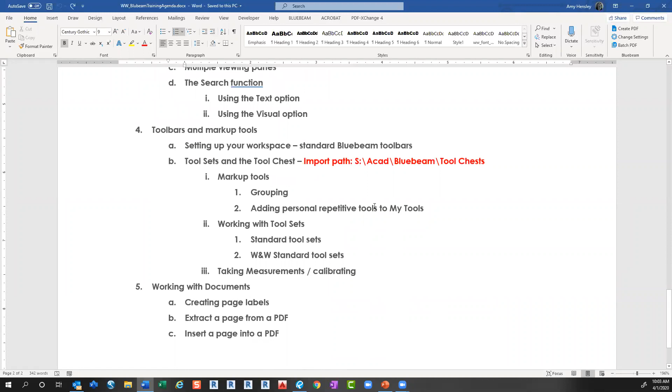We touched on toolbars and setting up your workspace, the tool sets, and if you want to use our standard tool sets, you can find them on that S drive. How to group and add your own tools to your tool sets, how to take measurements and calibrate, and then a little bit on working with documents.

Again, there's way more to it than this, but this is all we can really cover in an hour to get you in and understanding it.

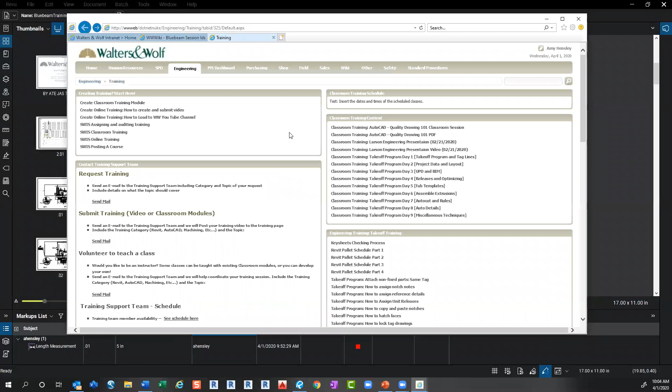We do have this document on the wiki, and I'm updating it to have some little videos added to it. So I can get to the Bluebeam training from a couple different places - if I go to Glass Division and training, but there's also a link on the Studio Sessions ID. So if that's handy, you can go right to this page and there's Bluebeam training docs on the portal, and it'll take you to that training page. And down here's our Bluebeam session. I don't know if I can zoom in?

There we go. So what we've covered today was in this part 1, the basics. Tomorrow is going to be this document. This video here is just a general introduction to Bluebeam if you've never opened it before. Drawing review stamps - some of these things I believe are things Bill has contributed to the wiki. So we have a lot of information, a lot of help available.

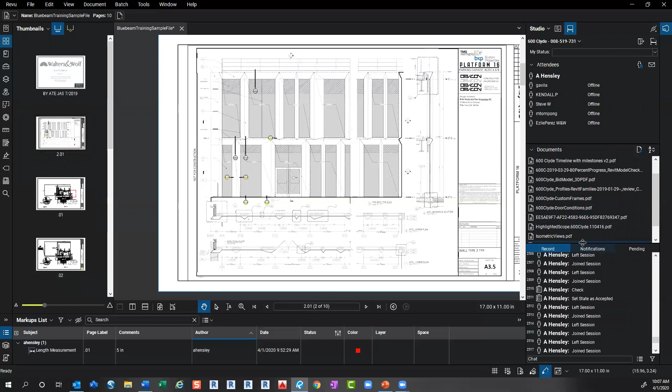I didn't want to do this during the session because I didn't know how fast or slow it might go. But let's see what this document gives me. Come on, being slow. I am working online, so I don't know why. Okay, let me try something different here. Oh, it's just being slow. Okay, so I'll go to a floor plan and we can take a dimension in any direction. Oh, I got them - now it's opening all of them at the same time. Okay, here we go.

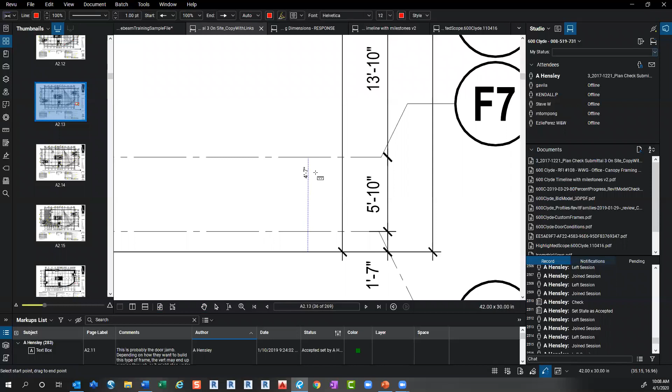So I want to know what this combined dimension is. I could add them up here, but it doesn't matter if I go horizontally or vertically - I believe that's what your question is. So if I say tools, measure, calibrate, and pick on these two lines, holding and dragging, it says 1 foot 7 inches. Now I can measure here, and then I can measure here. It doesn't really matter what direction you go in.

If you find that you need to recalibrate, I'll just touch on that. Say I calibrated it incorrectly - if I say tool, measure, calibrate, and go from here, and it's actually, well let's make it significant, I'll say that equals 5 feet. Now where's my recalibrate? I forget where it is because it's right click. Where is it? It's been so long since I've done this. I apologize, there's a way to recalibrate - I think maybe it's on this, to pick on it. Oh man, I can't find it.

But to answer your question, it doesn't matter which direction you go - it's just looking at what is the scale of the sheet. And once you calibrate, it stays calibrated for that whole session, for the sheet. Yeah, so for this session, this sheet will stay calibrated, yes. I gotcha, okay, so you believe you have to calibrate - I believe so, you have to calibrate each sheet in which you're going to measure something.

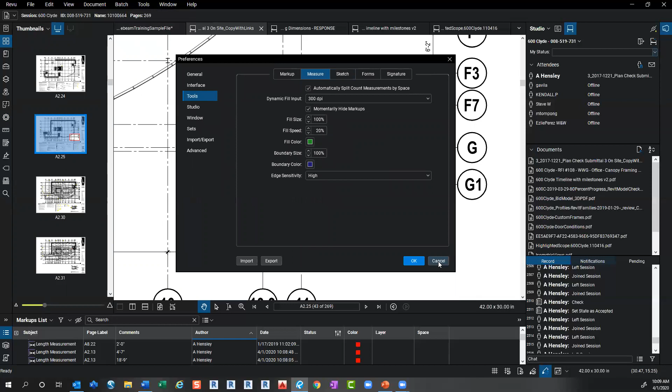I think so, let's see, measure - there might be something in here. I think somebody actually found a way to apply it to everything. I'm not 100% sure, but I do know it will stick. Yeah, that is a tool that I'm going to use a lot.

So thanks a lot, really appreciate it. Yeah, that's a huge help. Yeah, you're welcome. Thank you.